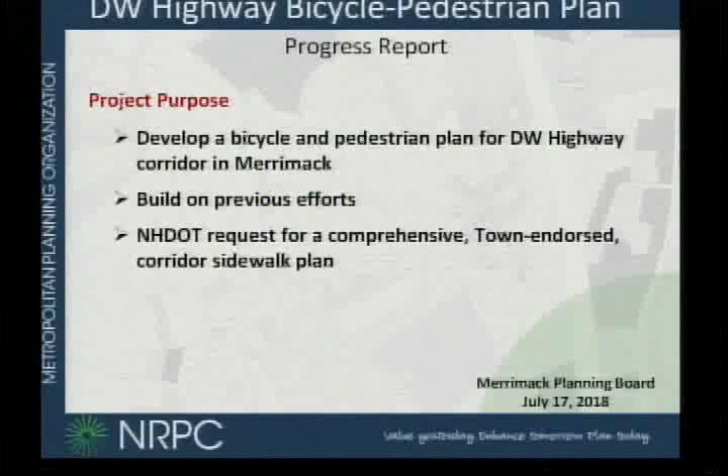So anywhere along the line here, just chime in if you want to ask or provide feedback. Project purpose, as a reminder: this is to develop a bike ped plan for the DW Highway corridor in Merrimack. We're going to build on previous efforts I'll talk about in a moment, and importantly, part of the reason for doing this corridor plan is to respond to a New Hampshire DOT request for a comprehensive town-endorsed corridor sidewalk plan.

The project has 2 scopes. Phase 1 is complete, and that was to map existing bike ped infrastructure in the corridor. I'll talk about that in a second, just to remind us what we talked about in December. Then Phase 2 is to actually go through a planning process and come up with a plan document.

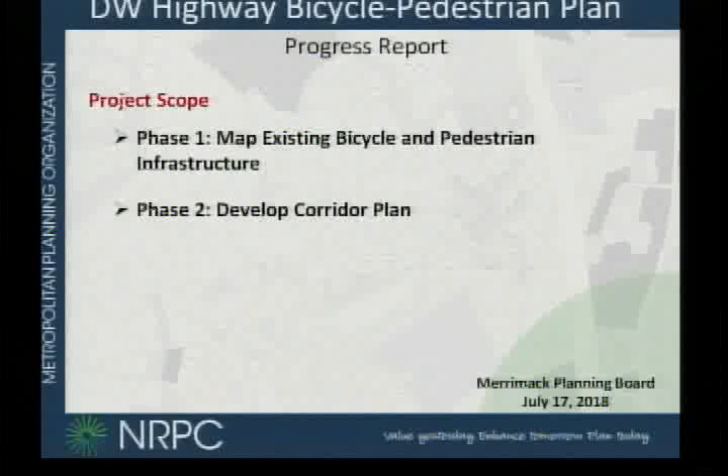So Phase 1, as a reminder: the process was our GIS department developed a base map using existing data layers that we already had. We took that base map and went out in the corridor. We basically drove and walked the entire corridor just to verify that information that we had.

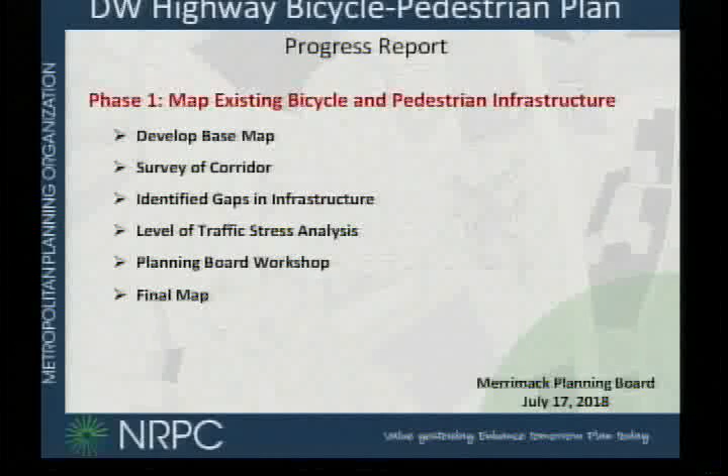Through that, we went ahead and identified gaps in the sidewalk infrastructure. Using that information, we developed a level of bicycle and pedestrian traffic stress, which is basically a way of taking the attributes of the roadway and calculating a measure of how comfortable it is to walk or bike along the corridor.

I think you'll recall we brought that information in a draft map to this board in December last year, got some feedback from you, and incorporated that into a final map. That's on the poster over there. I'll leave that overnight, maybe pick it up tomorrow.

If a little later we want to look at that map up on the screen, we can do that. I have that, and if we want to do it now or a bit later, we can. I just wanted to refresh your memory about that phase one.

So phase two is to actually develop a planning document. What we want to do is review existing plans, since there are several already developed previously. We did some additional data development. There's a public involvement process. We're going to end up summarizing key issues and then come up with recommendations, action steps, and an implementation process.

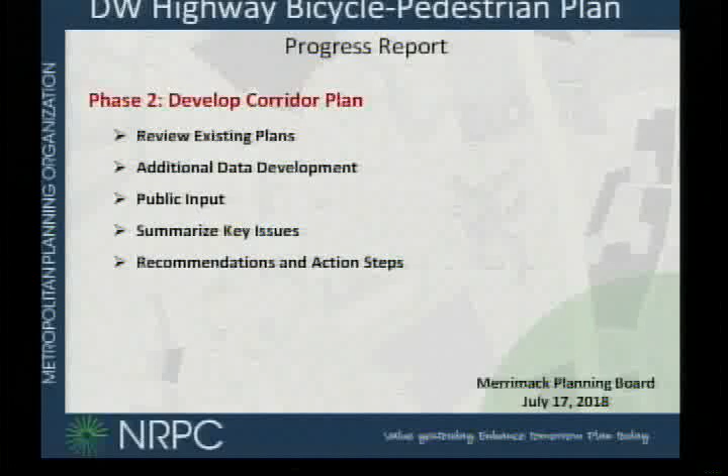So expanding on that previous slide regarding reviewing existing plans and documents, if it's helpful you can follow along in that outline document. Some of this is fleshed out a little bit, but there are existing documents previously developed, like the Town Center Pedestrian and Trail Master Plan.

There ended up being 9 recommendations for paths or sidewalks in that plan. I think you'll recall that included the area east of the Turnpike and from Rite Aid Plaza all the way to Front Street. In any event, there were 9 recommendations, and 6 of them happened to be along the corridor, so we want to consider them in this planning process.

The Town of Merrimack Master Plan refers to bike ped planning. In that third paragraph down in the introduction, you can see the master plan recommends developing a town-wide pedestrian and bike plan that considers design and location standards so that incremental sidewalk construction projects can be integrated into a single uniform network. So it's referenced in your master plan that was updated pretty recently.

The Mastrocola Safe Routes to School Travel Plan identified pedestrian and bike connections from the middle school and elementary school over to DW. So we're considering that. And then again, in 2013, New Hampshire DOT met with town officials to talk about sidewalks along the corridor, and as I understand it, they're certainly in favor of sidewalks, but they wanted to see them come from a comprehensive corridor sidewalk plan. That's one of the main reasons we're doing this, is to respond to that request.

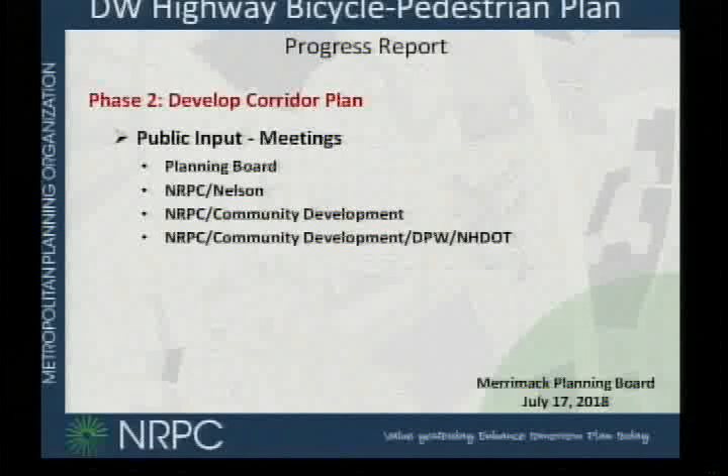NRPC has also met with community development a couple times, and I'm sure that's going to happen again, just to coordinate and make sure we're doing what seems to make sense for Merrimack. And then, really important, we will be meeting with community development, Merrimack DPW, and New Hampshire DOT, hopefully in August, to talk about some specifics and make sure that whatever we end up recommending for projects makes sense to New Hampshire DOT. So I hope that makes sense so far.

Another avenue for public input was voter surveys. I think you'll recall back in December this board thought it would be a good idea to get out there and get some feedback, and what you decided was to put together some surveys which were implemented at the April 10th town-wide elections.

3,010 voters voted that day, and 239 people decided to take this voluntary survey. To sum it up, 195 of those respondents believe that sidewalks and/or bike lanes should be constructed along DW. 23 voters said they should not, and 21 did not respond to that question.

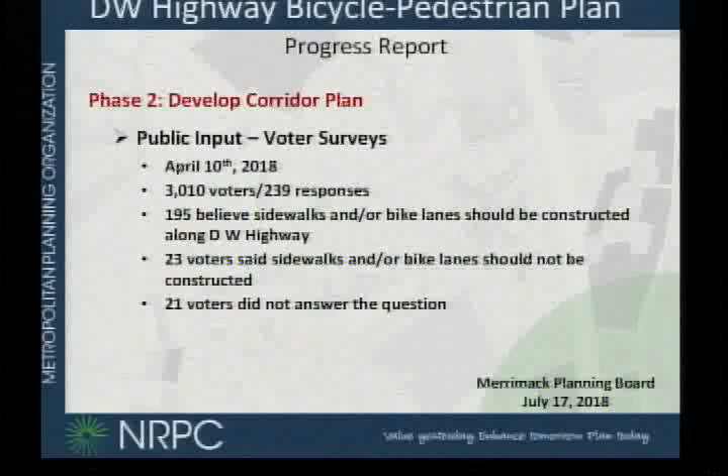The other question was a way to rank some of these segments along the corridor. Voters were asked to choose up to 3 of these segments.

The highest ranking segment was to complete the sidewalk network between Town Hall out to DW, and then up the west side of the corridor, past the library, past Wire Road intersection, over the Baboosic Brook Bridge to the post office. They thought that was the most popular for this sample of voters.

Second most popular was the other side of the corridor, from the intersection at Baboosic Lake Road, up the east side of the corridor, all the way over the Baboosic Brook Bridge to Merrimack Commons tractor supply area. Again, this was about completing the sidewalk network along that part of the corridor.

Third ranking was Watson Park to Twin Bridge Park, on the east side of the corridor. I know that segment also includes part of that Town Hall to Merrimack Commons stretch, but the idea was whether you want to go all in on a longer segment versus a shorter one, since there's some overlap between them. So a bigger kind of segment.

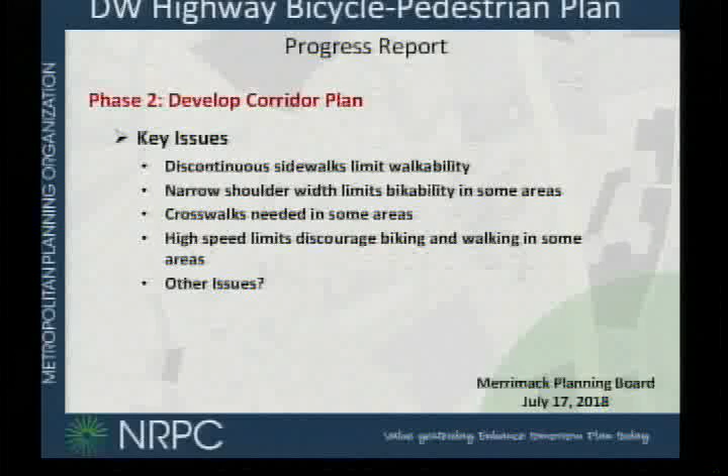We did come up with these preliminary recommendations, based on our mapping effort and voter surveys. The first group is to fill in the gaps in the sidewalk system, basically all of those segments I just referred to. Also, I know you don't want to let the Woodbury Street sidewalk fall off the radar. I know that was on the books to go forward, and it was also identified in the Mastrocola Safe Routes to School project, so it's an important connection back into that neighborhood and the school area. Don't want that to fall off the radar.

As far as improving bike conditions, one basic thing we can do is have a consistent shoulder width along the corridor. There are other pavement treatments that can be applied that will provide more detail once we have a draft of this document. So those are some recommendations, food for thought to start thinking about. We'll firm them up and in the future meet with community development, DOT, DPW, and start trying to dial them in a little bit.

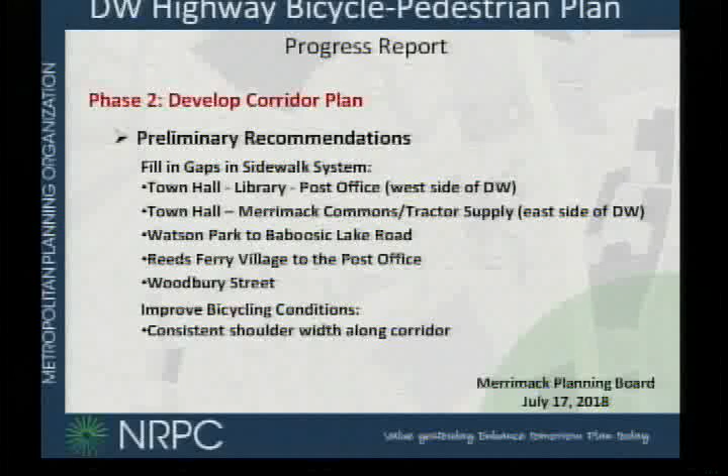I know that our work with you has been focused specifically on the DW corridor because we've got to make the best use of your resources as possible, and we can't sort of go completely across town.

With respect to dealing with the DOT, that makes sense, because that's the part of town where they've got some say in what we do, that and 101A. However, there's some support, I think the surveys showed it, for continuing the sidewalk up to the middle school at Madeline Bennett, up at Baboosic Lake.

I know that won't be captured in a DW corridor report because of what your focus is. That doesn't mean we can't support sidewalks going that way, even if there's not going to be commercial development there to build sidewalks. I do want to make sure we have that somehow incorporated into the priorities, so that when there's grant money available to apply for certain things, that's one of the items on the checklist our town could consider as a project.

Yeah, absolutely, so we could include that in there. I don't think it's been specifically in other plans, we'll have to double check that, but nonetheless, we can. It was one of the locations on the survey. It was on the survey, definitely.

Just in the newspaper earlier this week there were some finalized plans about 101A widening and pedestrian traffic there. I know, Tom, you guys got a report to the town council about that. I didn't really know a whole lot about that project until I read it in the paper. It seemed like that one had gotten forgotten about and was different than what we had talked about in the past. But there's going to be some sidewalk development out there that's also not in your corridor.

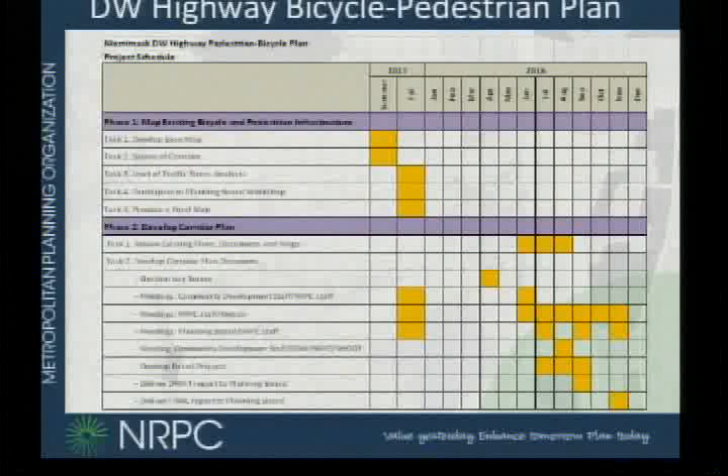It is for local officials designated by the town or city for a capital reserve fund for municipal transportation improvements, including but not limited to roads, bridges, bicycle, pedestrian facilities, parking, intermodal, electric vehicle charging, public transportation.

So it sounds like it's all encompassing. It's a statute we've got, we're using it, we've just dedicated it to road repairs. It could also be dedicated to other things if the council chose to do so.

It would go through the legislative body. You'd have to go to a warrant article to amend it, I think. But I don't know, probably so.

Either way, I think our role is to be a cheerleader and let the council make their decisions, because that's their role. We can make recommendations as part of the capital improvement plan, presumably, and certainly have that discussion with them when they come to us on those kinds of things.

Tom, do you happen to know how much of the assessment there is? Is it the full $5 that the statute allows? So there's no room to increase that, you'd be fighting to compete with other things that are already trying to spend that money. That's a tougher one.

Well, neither one of them is easy right now. It goes directly into road maintenance and repairs, and it's part of our annual paving budget, which is like $1 million.

Thank you for that, Tom.

Tim, one of the things I wanted to mention on the map you have, you guys did a great job creating some focus areas, I think you have 7 of them as you go down the corridor. That's really an excellent way to examine some of these areas and what the unique issues and priorities are in each one. Having that kind of concept come out in the final plan would be pretty useful.

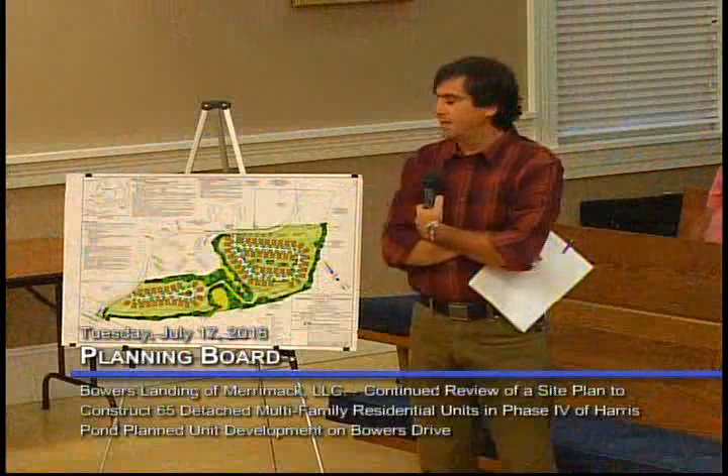As Tim just eloquently put it, we were here last month. I gave a full presentation on the package. We had a few minor comments from staff, which we've addressed. Really the only one was related to the sidewalk on the cul-de-sac, which the planning board was looking at. We extended the sidewalk to the end of the cul-de-sac here, and extended it up into Phase 7, which we'll bring forward when that next phase comes forward. Other than that, we got comments from CLD and staff and addressed them all, got them back. There might be one or two that may be outstanding, but pretty minor.

Being first on tonight, I'm going to keep it short and simple and answer any questions you may have. I do have one other thing - Fire Marshal Manueli has had a chance to look at this. He has not finalized his memo, but the only comment he has is that they will need hydrants per the regular comments he typically makes for these projects, about 400 feet apart or something.

Matt, one of the questions that came up last time, I think Nelson may have asked it, was whether the people who buy into these units will have access to the clubhouses or other amenities built in the previous phases. What we're doing, because we have multiple different kinds of users here - right now we have the apartments and the existing clubhouse behind the Dunkin' Donuts. We'll be coming in with some future apartments in the next phase, and we envision attaching those to that clubhouse since they're similar uses. This phase is similar, with our clubhouse now at this location. So we'd have the townhouses and single families all use one clubhouse, which reduces the fees. The owners have met to get it all put together, and that's what they're moving forward with right now.

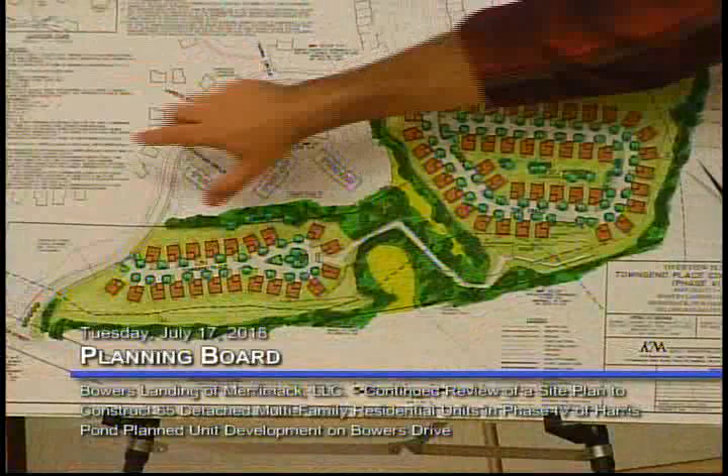I'm not sure I understood when you said there's no pool over there. If you remember, when we did the 50 units on this one, there's a clubhouse right at the corner. It originally was going to be a clubhouse for this whole parcel down here, but it was going to be in the middle of those apartments and stuff, so we moved it and did the 50 and put it here.

So these will all be one association. The apartments will be one association, with 2 clubhouses on site. Again, recreation, passive recreation, also with trails. We tried to incorporate sidewalks, the whole 9 yards, so that it is a community.

One question - you said 2 associations, so are there going to be 2 different associations, or is it all one? There currently is one for the apartments existing up on Bowers, and then there's another. I just wanted to clarify that.

Thank you, Matt. Other comments or questions? All right, let's take a moment to conduct a public hearing. Is there any members of the public or abutters, citizens who wish to weigh in and offer the board any information? Please come forward to the table here.

Come on forward. Let me bring that. You go ahead and sit down there, I'll bring you this quickly. What happened to the microphone? You're certainly welcome to both testify at one time, but I didn't mean to suggest you had to. Come forward together. We know each other, we're friends. Well, I'm glad of that. I'm glad we don't have one in favor and one opposed, you guys can just duke it out there at the table. Once you're settled in and ready, make sure the microphone's pointed towards whichever of you speaks first. The folks at home can hear us fine in the room, but they get nothing when you're not by the microphone.

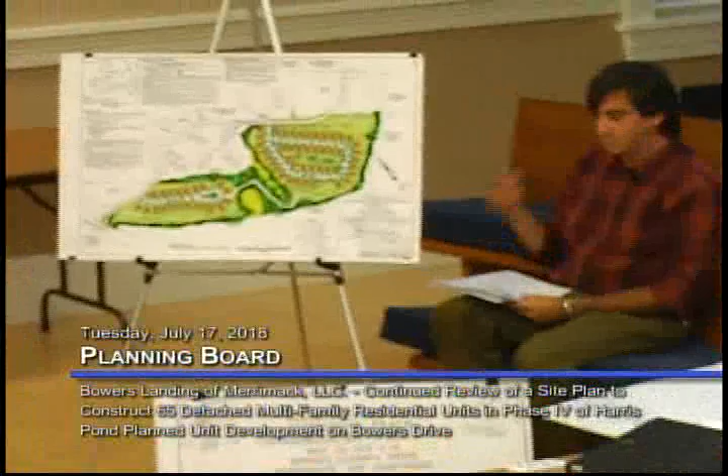I think Eric covered the questions that I had, but I wanted to make one comment about the layout. It looks to me like there's going to be a kind of 4-way intersection at the entrance to one of the areas. I think it's Esquire Lane, the existing street, comes in at the same place. Yes, right there — at that point you have two streets crossing right together.

It would seem to me that it might be more aesthetically pleasing and maybe better for traffic flow if the new street entered at a different location, further towards the right on this map. I would just ask that the developer consider that. Sure, I'll certainly mention it to the developer. I think there's some strategy to the way they've laid it out in terms of Eric's question about sight lines — if you moved their driveway towards that curve, you might find yourself in a position where that curve prevents you from having that 250 feet.

Well, actually, it seems to me that the site, with the present trees — as you can see on the drawing, there are trees very close to that intersection in the new development area, while there are no trees whatsoever on the other side. So by moving the road in the direction I'm proposing, you would, in fact, improve sight lines. Now, if sight lines don't include trees, I guess that makes no difference, but I don't see how it could hurt sight lines. I don't see where sight lines have been considered for the present plan.

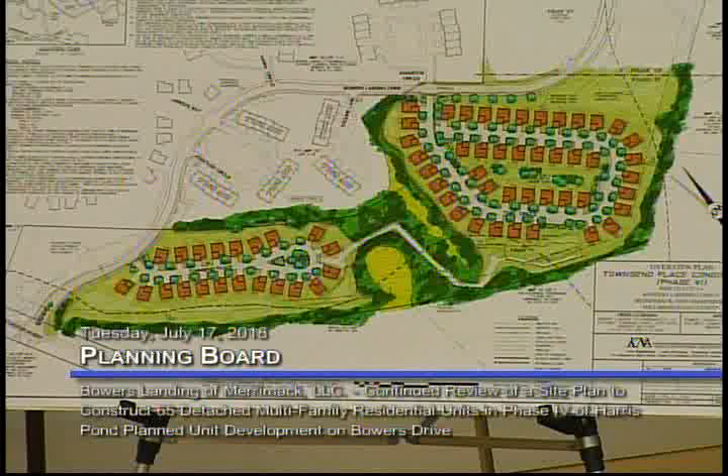There's a lot of thought that goes behind aligning the roadways to how they meet the ones across the street. And if they're not going to meet straight on, you want them to be a certain distance apart so they don't turn into each other or have people that aren't expecting cars to come off the other road. There's probably a dozen other factors I don't relate to off the top of my head that tend to dictate the way the plan has to be laid out to work and satisfy all those requirements. So it's tricky.

It's not always easy to make adjustments. Not the least of which is headlights in somebody's living room window if it's not coming to a T intersection or a cross intersection. Yeah, that's true, if you have intersections that don't line up.

Again, if you look at the map, the likelihood of headlights in people's windows is much greater the way it's laid out than if you had the new portion moved downward. As people come out from the new portion, headlights are going to tend to be into the existing units, whereas if they moved down, they'd be into a wooded area.

I understand your perspective. We'll let the applicant take a comment, take a look at it, and see. Thank you for that. Are there other members of the public or abutters who wish to weigh in? All right, seeing none, we'll close the public hearing. We'll invite the applicant to come back up and take the table and respond to those things. Thank you, gentlemen.

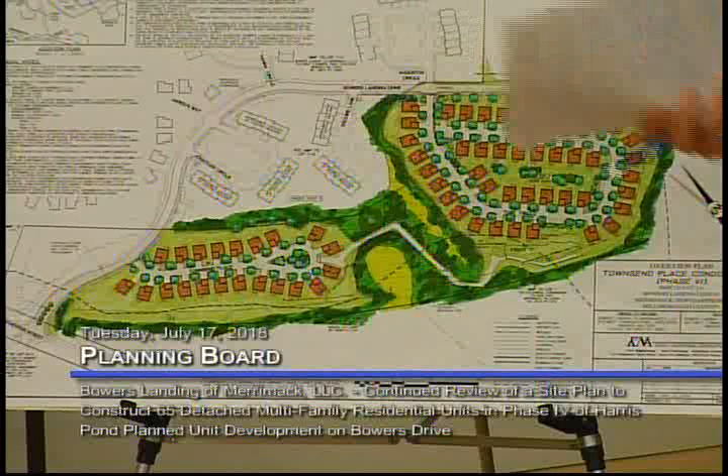Okay, good evening, I'm Matt Peterson again. The homeowners association, as you stated, the pump station would be the responsibility of a homeowners association, not the town of Merrimack, so that would be one of the things the homeowners association would have to take care of. Number two, as the Chairman stated, the wetlands, we've mapped all the wetlands here this year. We do meet all the setbacks. It has been reviewed by staff. We are not in the 100-year floodplain, so there are no issues on that.

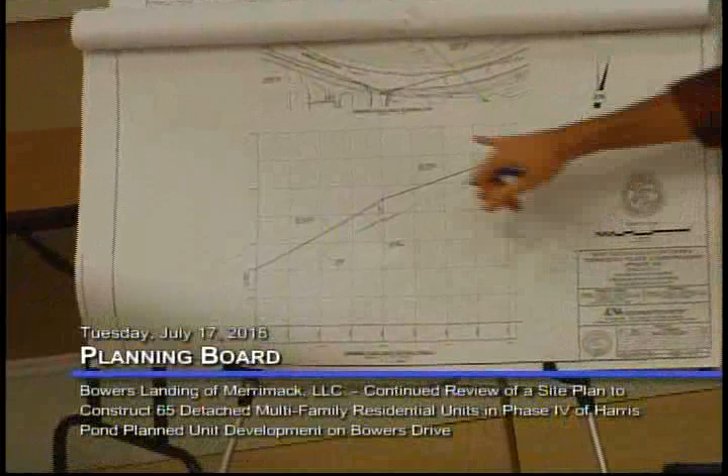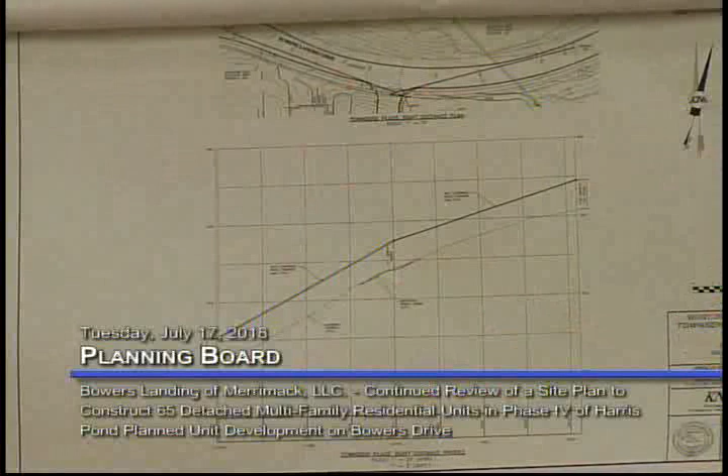We have all the survey out there, it's just a matter of cutting the profiles that we did. CLD didn't ask for it. It was an existing roadway, so there was no need for this particular project to do the sight distance to that location.

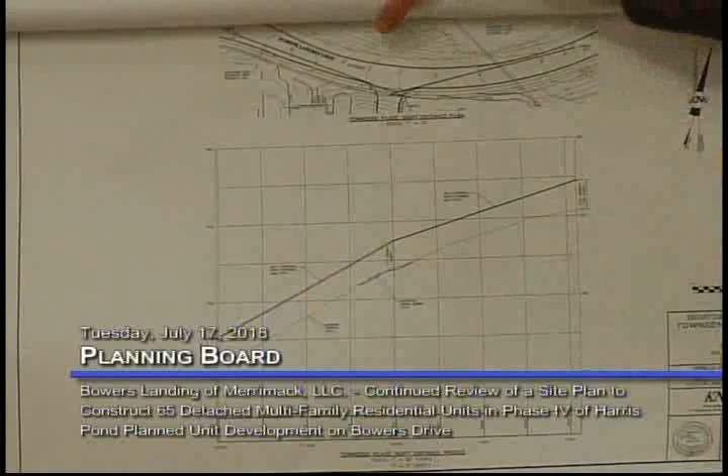No, I understand. And if it's not one where you're required to do the sight distance, I'd still ask you to consult with your client. If there's something in the way that I heard should be fixed, that doesn't make sense. I'm sure nobody intended to put fences or trees or something blocking the view from that turn, and it's probably something people can correct if it's a problem out there.

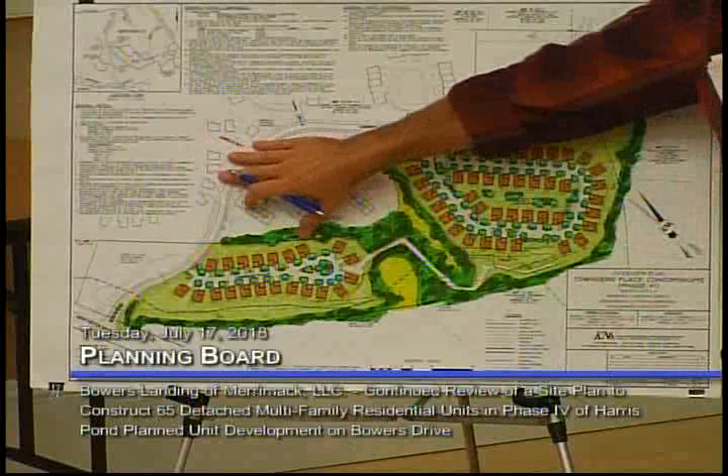And then the last thing I wanted to state for the board members and the homeowners that just spoke - we had met with this group last time, so I was told, but I heard something different tonight, so I don't want to go back and forth with that. I'll leave it to the board to say I'll build another clubhouse at this point if we can't combine with the other one. We thought more people would help bring down the fees and everything if they're already full. I've got the room right here, I already did it. I just didn't put a building there because I thought it was overuse, because you've got to pay for them both.

So if we can't work it out with staff and the homeowners association to allow use of this one, we would build one right here with the parking that's already there. It's already flat, and I laid it out that way originally anyway, so that's what I'd ask based on the comments.

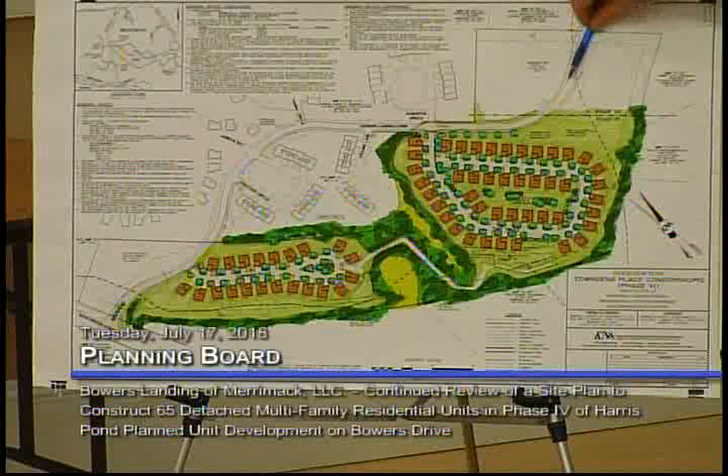Thank you for that, Matt. How about talking a little bit about that intersection by the upper circle, across from here, as we come down this grade is dropping. We're a lot higher at this point. Let me go to the grading plan for you.

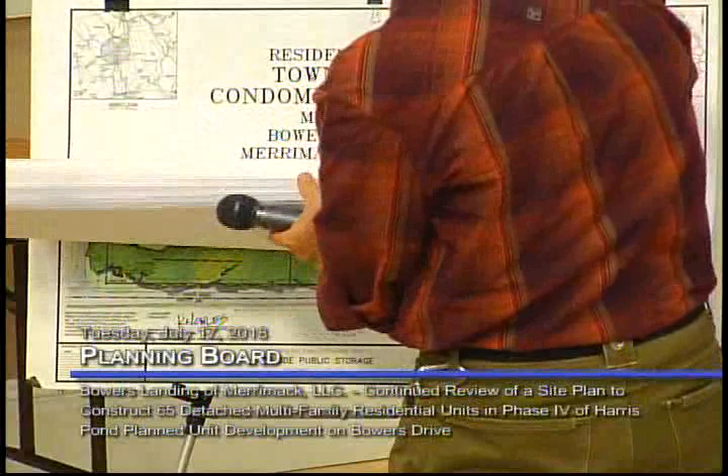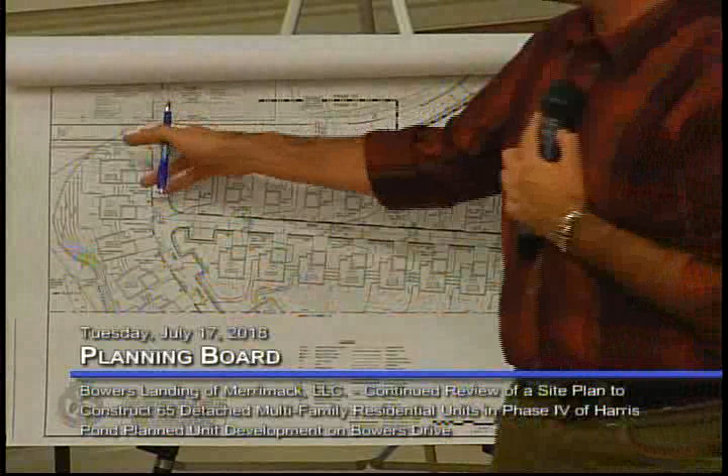So up at this location we're at 220, and then it goes up to 225 here. We came down into the site at this point. I've always been taught to line driveways up across from each other, because the homeowners will yell at me about headlights going into their property. We do have the sight distance at this location.

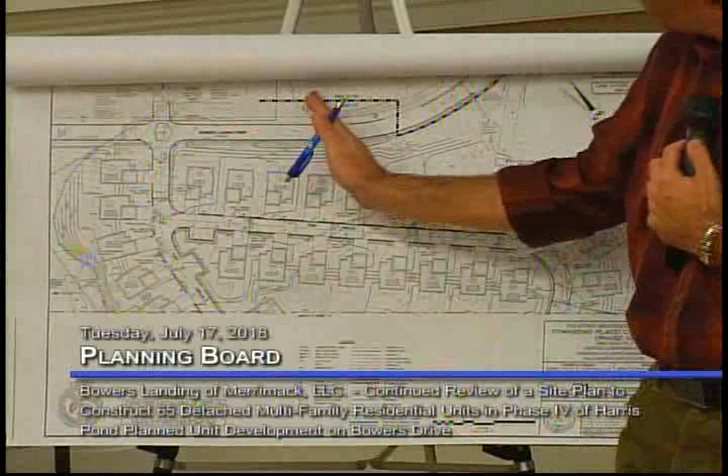I lined up intersections. We're looking at a potential future intersection here for the apartments we did concepts for and met with staff about a while back. We haven't shown them on this plan because the buildings aren't finalized, but I'm starting to run out of room between them. So this made the most sense with future plans - one here, another proposed here, and one more up here - so they all make sense as future plans, in order to meet the spacing requirement between driveways.

Any members of the board have further questions for Matt about the comments raised by the public or anything else?

Back to the memo - are there any waivers we're taking up? There are not. Okay, so then board members, it's appropriate to take up whether you'd like to take final action on this application, and if so, what that would be. So what is the will of the board?

Mr. Chairman, I would like to propose that we give conditional final approval for this, subject to the various points that Matt just made, also the memo dated June 11th, 2018 by Mr. Price, and also any of the comments from Mr. Manueli, the Fire Chief, which are already in the record. Otherwise, I would make the conditional final approval.

Is there a second for Alistair's motion? I will second it. Second by Nelson. Further discussion?

Remarks by Matt included that business with the clubhouse. Oh, absolutely, yes. Okay, I'm okay then.

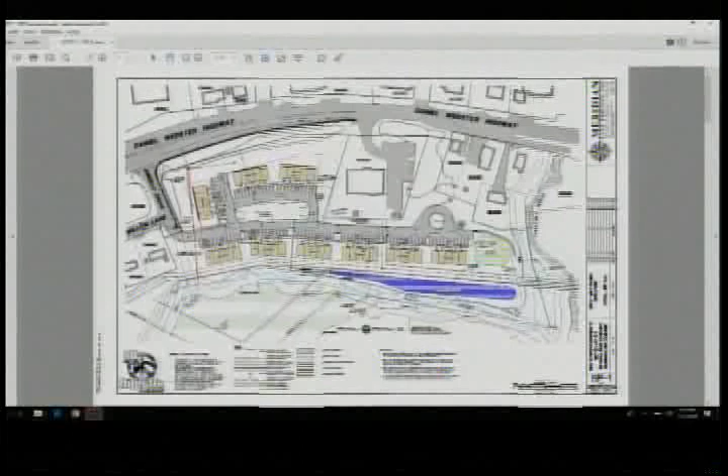Basically, what you're looking at, the entire project mitigates stormwater through conveyance catch basins to a large infiltration basin sized to meet the town's requirements and state requirements. We're showing adequate parking throughout the development. We've got pedestrian sidewalks throughout, including all along Daniel Webster Highway.

I'm going to go further in depth with the waiver request in a minute, but one thing that's really important to note right now is that during our design phase, we found out that a large portion of stormwater drainage from Daniel Webster, Greeley, Continental, and even some of the on and off ramps of the highway flow down and discharge onto this property. At this location right here, there's a 30-inch pipe that comes out. It's right next to Angelo, right here.

I have been in communication with DPW, and I've asked that this approval be conditionally based on designing that. It's going to incorporate us working with state and local entities to determine the exact extents and, more importantly, ownership of catch basins and culverts. It's our intent to convey that stormwater through a culvert straight through the development, shown here in red, and discharge it right to the wetland and water area.

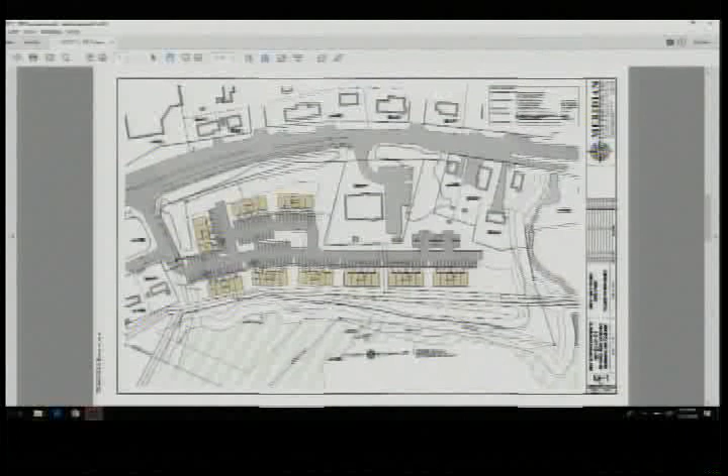That doesn't look so good. Did you have to give it up? It's pretty obvious, if that makes sense, but just odd to have it that way in the first place. Yeah, it is odd to have it that way.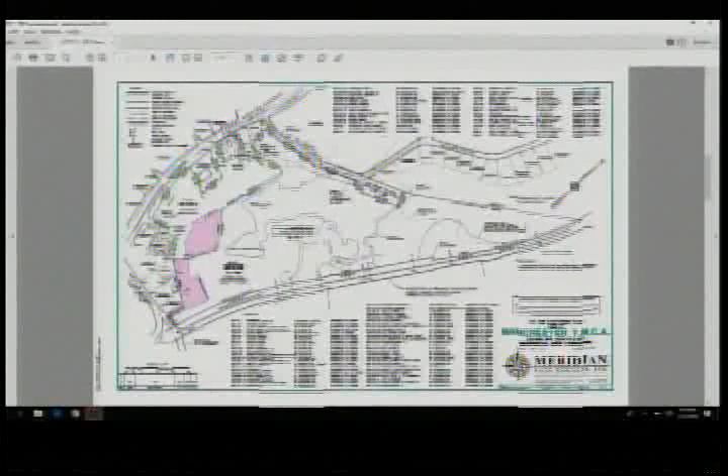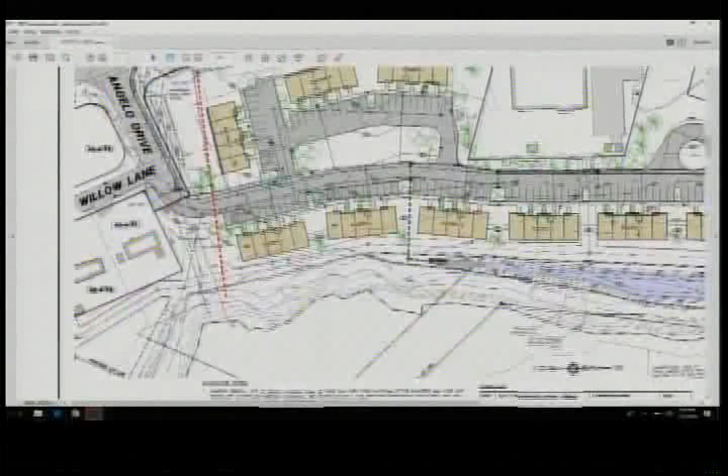Tell me a little bit about the topography, what's going on with that land, because one of the things coming off the page at me is you're damn near getting access to Griffin Street as another potential entrance or exit to your property before you do the transfer. Once you do the transfer, you are quite a distance from it, but not that far from Griffin Street with the flag as it exists now. A little bit of help from the YMCA, and you could solve your second access problem through Griffin Street to Greeley Street.

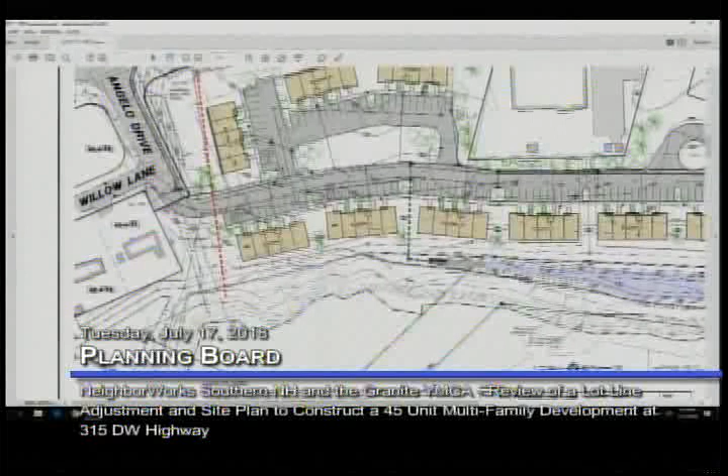At the conclusion of the last design review meeting, members of NeighborWorks and myself walked that entire sewer easement line all the way out to Griffin, and it is not friendly terrain. There's an extremely close pinch point to wetlands, and a sharp right-hand turn to get into Griffin next to a sewer pump station. Not a friendly access, and an extremely long access to get to Griffin. We felt it was uneconomical and would be a burden to improve and do the dredge and fill permits required to get that access to Griffin. Not saying it can't be done, but it would have been a tremendous burden.

It does sort of give you an entrance that gets you to a signalized intersection at Greeley Street, and it also avoids all of these folks on either Island Drive or Angelo Drive who would prefer to see the traffic go somewhere else.

I don't think I can argue with that statement. But if Island Drive is only the backup entrance for Captain Manueli and his team, that's not quite the problem it was when Melton were doing it, which was considered likely to be the primary entrance, which is why, God rest her soul, Rose Arthur made our lives a misery. But I think that's not necessarily so, it's a partial - the fire department prefers it not be gated, which means it's going to be access for the patrons as much as for the fire department if you don't gate it. And the DPW has some serious questions about the Angelo Drive approach because of the slope.

So yeah, I don't see how you can avoid Island Drive. Neither one of these entrances is great. I'm with Tom on that.

But I also understand that access on Griffin Street is very difficult because of the slopes and the downhill. If you come down that turn, it's downhill to go underneath the railroad trestle there, which the town has been struggling with for years regarding access to a boat ramp down there. And I'm going to just guess, speaking for the applicant, that the costs associated with that, with the density they're proposing, would not work financially.

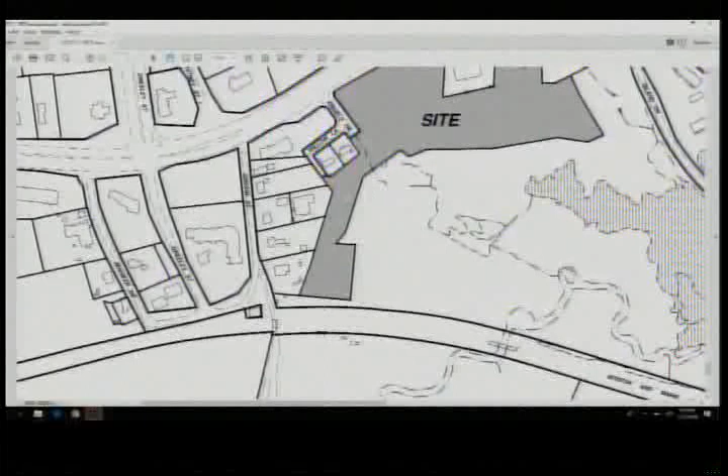And to be quite honest, the idea of traffic coming out onto Island Drive to get back onto DW Highway, that's a big issue too, because that junction of Island Drive with DW Highway is already a bad junction. I'd hate to think of this being the prime access, which is why everybody before didn't like the Melton way of doing it.

Well, and Angelo Drive, the folks over there don't like it either. It's not a good access point either. That's why the Greeley Street thing made sense, because then you're putting people at a signalized intersection where they can get right on the highway if they're going to work, not on DW Highway, unless they have to be to go north or south to get to work.

But I get the idea that it's expensive. The comment from the fire department was about a second means of emergency access. That's how I understand it to be. It's been verbally explained to me, I haven't gotten it in writing. That's how I understand it to be. No, we don't have it in writing either, but what's been suggested is that they would reluctantly accept a gated one, but they prefer it to be ungated.

And if it's ungated, which I think I prefer as well, then that's public access. You're really not going to keep people out of it by saying, oh, don't go here. They're going to go right through there. And frankly, I'm not sure that Island Drive isn't a better access than Angelo Drive.

Neither one of them is great, but I agree with you. Angelo Drive is almost a 10% slope leading right down to where your driveway is, which is what DPW's questions are about with that entrance. In the Melton Associates plan, that was adequately regraded to 7%, which can easily be done.

My phone conversation with DPW this morning - the request was to have Angelo extend past our development into the hammerhead turnaround, so that snow can be pushed straight forward, backed into our development, and then pulled back out Angelo. Can you do that? Yes. If that satisfies DPW, that helps deal with Angelo Drive in terms of what DPW's concerns are.

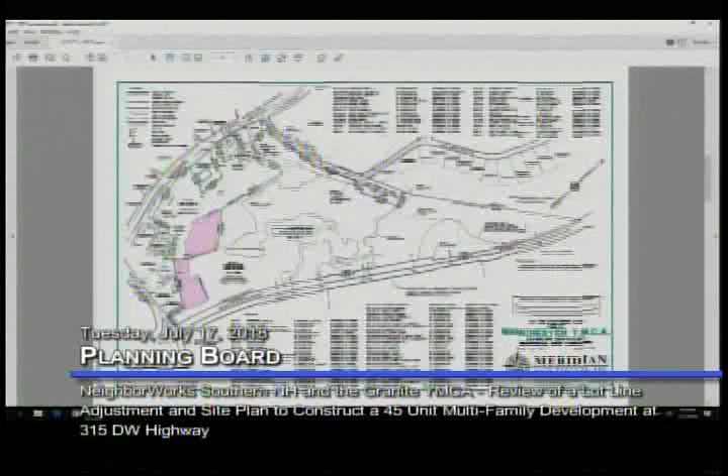Going a little further, we're touching base on this lot line adjustment. We were talking about this, and then we jumped into access. The need for the lot line adjustment is to convey water all the way down to the edge of wetland - that's the main purpose of it. We also use this to allow us to shift units back and forth a little to provide equal separation, and allow some drainage culverts to get pushed between them. Otherwise we were bumping into some of the old building setbacks, so it was twofold: it helped us create a more uniform development, but also allowed us to access the edge of wetland down in this location to properly discharge stormwater.

So tell me more about the discharge.

I know that you don't have to treat the water, but what do you have to do to deal with flow rates so that you don't erode? What does your head wall look like where you dump a 36-inch pipe?

There's a couple of options. There was a drainage basin feature, call it larger riprap with a plunge pool that could really dissipate all of the energy from the stormwater. You just need it on a larger scale for a 36-inch pipe. This might be a 42-inch pipe. We don't know until we interconnect all the way back. I can't really answer that question until I get to that point.

I do know I need that whole slope and access to all of it in order to create an adequate stormwater design. Okay, I understand.

So that's touching base on the lot line adjustment. I don't know if you wanted me to jump into the waiver request now, or if you want to talk about these items separate. Please proceed in whatever order you think is right. Okay, that's fine. So the waiver request is for parking.

To meet the town's requirements, I need 154 parking spaces. This plan here, which you board members have, shows 154 parking spaces. This equates to 3.4 spaces per unit, based on 1.25 spaces per bedroom plus 0.5 spaces per unit.

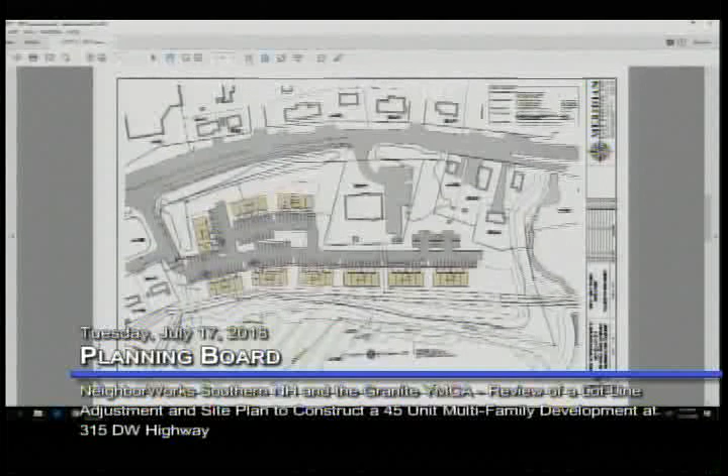Just to clarify, Kevin, the data that NeighborWorks has from their previous and existing projects, is this a number that's consistently been appropriate for the project? Correct. They have, I don't know if it's the demographics of the people who live there, the number of cars these people have, but they have that information in detail.

So remind me of the numbers. Well, how many do you want to build on your cul-de-sac plan, not this? 100 versus 154, so we're asking to waive the construction of 54 parking spaces. And how many apartment units do you get? There's 45 units, a mix of 3-bedroom and 2-bedroom.

Are these rentals? It's all rental, townhouses I guess, if you'd like to call it that classification.

So your approach is, I know it's not exact because of 2-bedroom and 3-bedroom units, but roughly 2 parking spaces per residential unit. One space per bedroom, probably. That's kind of the vicinity we're at. I can't recall off the top of my head. Thank you, you can read the plan. I'd have to scroll into it. So there's 105 bedrooms, so it's close to 1 per bedroom. Yes, it's pretty close to 2 per unit.

And the reason I specifically asked Kevin that question is that when you're looking at parking waivers, that's one of the criteria the planning board has directly from the regulations: when an applicant has comparable data from their own projects in other places, that's one of the justifications for granting a parking waiver. Understood.

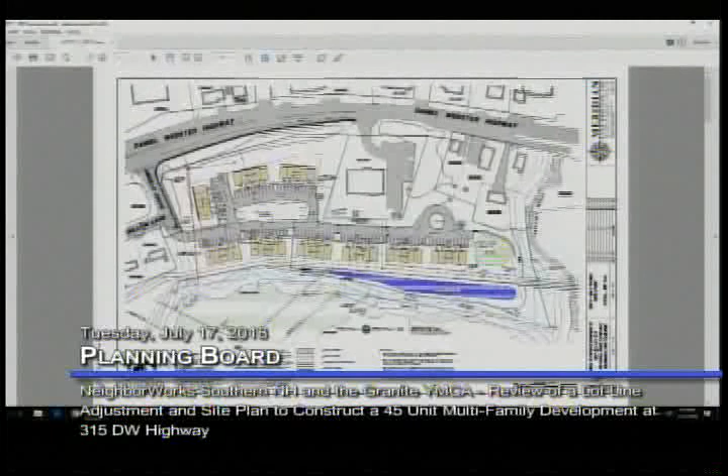Chairman, if I could interrupt you, I apologize. I have Jennifer with NeighborWorks here with me who would like to speak a little more to parking. She knows numbers like Robert does, so I'll give her a minute. Do you want to see her? Thank you, Chairman.

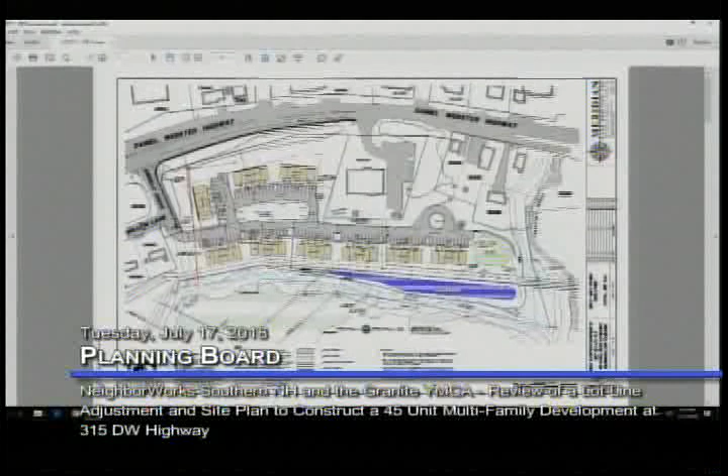I'm Jennifer Vadney with NeighborWorks Southern New Hampshire. Just to follow up on what Kevin was saying, typically we do 2 parking spaces per unit. So I absolutely can appreciate the idea of parking per bedroom, but really, whether it's a 2-bedroom or a 3-bedroom, it's 2 spaces per unit. As Kevin said, it's really accurate to the family sizes and dynamics. Typically it's one driver and a couple of kids, or if it's 2 drivers, it works out because we have single people in some of these units as well, so there's only 1 car per that unit, and then we do 10% extra for guests.

So typically we have not had any parking issues. It's all rental, it's a lease issue. People, when they sign their leases, know and understand that it's 2 spaces per unit. So they're actually assigned 2 spaces? Correct, there's an assigned space by number, a particular space, and it belongs to them.

In any neighborhood, any parking situation, once in a while there's a call that says, geez, this person has an extra car, and we work with the tenants. I don't think we've ever had an eviction because of too many cars. Okay.

It's an issue I think you guys have to manage, and if you're managing it, it sounds like it can be made to work. I think the cul-de-sac area and some of the areas where people could edge-of-the-road park or edge-of-the-pavement park needs to be managed and controlled. But other than that, if you guys think the parking works, I don't have any issue with that, and I'll support the waiver the board puts forward.

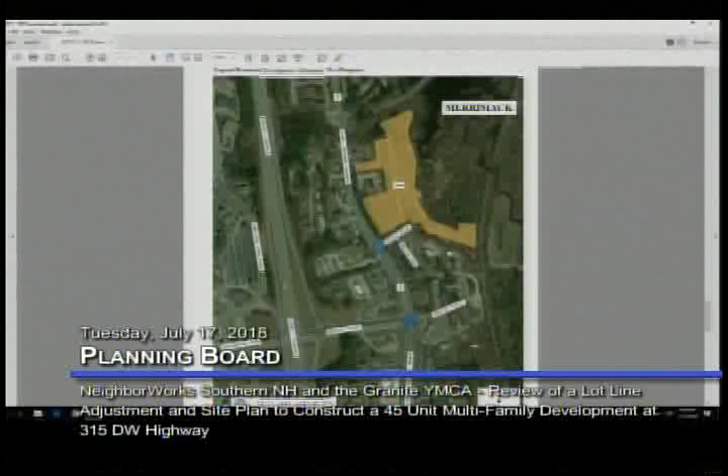We distributed these trips to the adjacent roadway network using U.S. Census journey-to-work information on people who are living within the town of Merrimack and where they are working, for the weekday morning and evening peak hours.

It showed that approximately 35% of the traffic would be headed to and from the north along Daniel Webster Highway, approximately 30% to and from the south on Daniel Webster Highway, and 35% to and from the east on Greeley Street. They would be headed mainly towards the Everett Turnpike and down Continental Boulevard.

Based on this distribution, it resulted in traffic increases of approximately 8 to 12 vehicles per hour during those peak hours on any of the adjacent roadways, which is approximately one additional vehicle every 5 to 8 minutes.

We did a capacity and queue analysis at each of the two study area intersections using the Synchro analysis model, which generally showed that there were favorable operations at both of the study area intersections.

At the Route 3 and Greeley Street intersection, all of the movements were operating at what's considered an acceptable level of service, D or better, during all of the time periods that were analyzed, with the exception of the southbound left turn movement into Greeley Street.

However, this is an extremely low volume movement. It has less than 10 vehicles during the peak hours that are making that movement. It was operating at a level of service E, which is still considered acceptable for a low volume movement like that. The volume to capacity ratio was well below 1.0, which indicates that there's more than adequate capacity there to accommodate it. The additional traffic generated by this project was not anticipated to increase delay on any of the movements through the intersection by more than 2 seconds per vehicle, or increase queues by more than one vehicle in any lane.

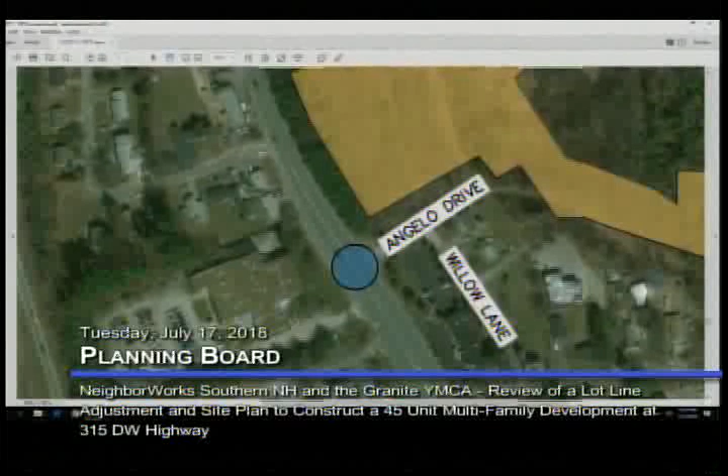Yes, so I'm not too worried about this one, Bob. No, I am not either. But some I would be, you know. I think there's an awful lot of water flowing across this site to deal with the drainage, and that's where my thought comes from. Traffic flow isn't going to change based on there being a hammerhead or something like that to analyze.

But this is a fairly complicated site drainage-wise, because for whatever reason they're the repository of half the drainage in town already, through no fault of their own. And that's going to have to get dealt with over into some kind of an outlet structure that isn't designed yet. That was dealt with on the previous application, but me as an engineer, I can't just blankly stamp that. I need to verify that, which is why I'm going to the extent of evaluating that drainage area.

But that was reviewed, previous application took that into account. But you realize that what you just said is we should trust an old plan, but you're not going to trust an old plan. You need to look at it before you're going to stamp it, but you want us to bless it without... I mean, if you need to relook at it again, why don't we? There's a difference between somebody's stamp on a plan and somebody reviewing a plan.

I know, and the stamp and the signature on this plan will also be mine. It's part of our role. Now, I don't want to be a stickler for details because the normal process on these sites doesn't have very significant things that aren't there for the first time for the review, but this one raises a couple of eyebrows for me with some of the things that we just don't know.

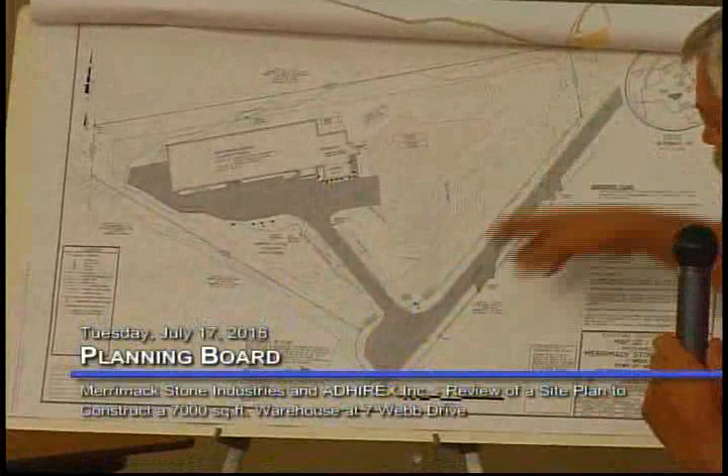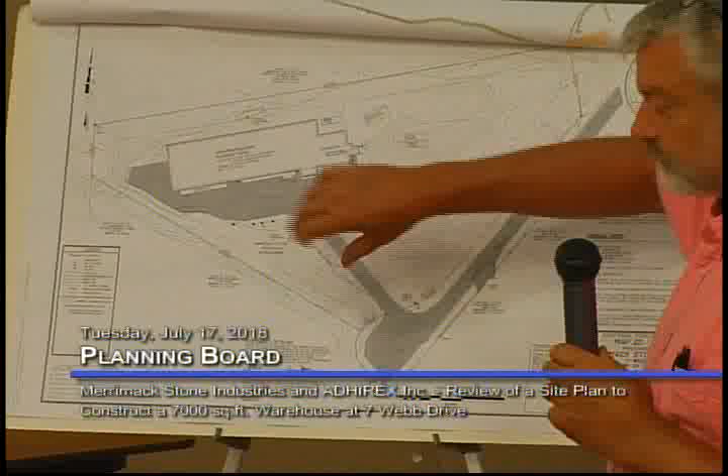For which he cuts granite, makes countertops and that sort of thing. And he has a nice flat spot off to the right, which is the intent—he's outgrowing what he has now, so he's proposing to add a 7,000 square foot metal building with the pavement going around it.

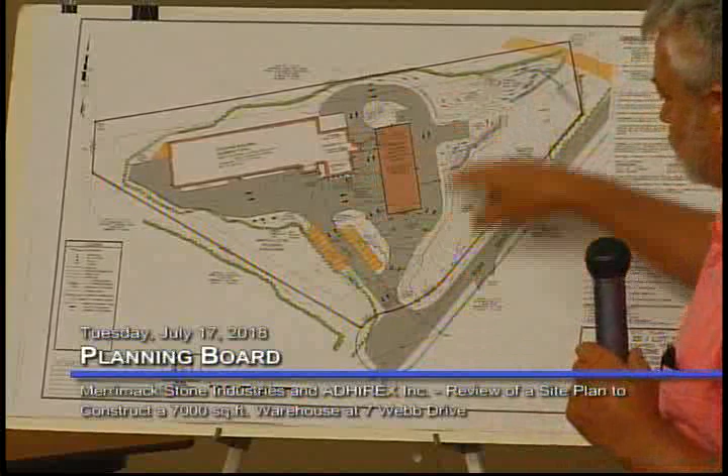The impervious area will be mitigated in terms of stormwater by 3 basins that will be placed around the site. The parking is designed to be adequate, slightly more than what is required, as has been pointed out in the staff memo.

We would like a waiver for the sidewalk, as it's industrial, and I don't see that it would be appropriate for this site.

And for architecturals, we've given the structural plans, which show the elevations from all 4 sides, but they're not all fancily rendered. If that's suitable for this application, we'd like that. If that needs a waiver not to accept those, then we'd like that as well to be one of the waivers.

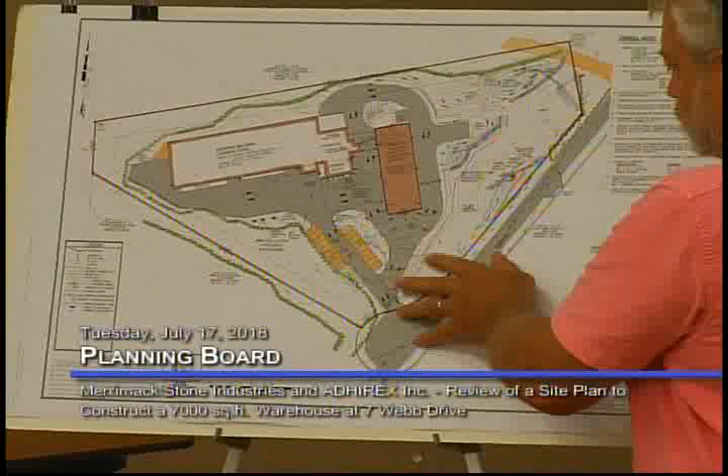We're anticipating any work—this will all end up being a grassed area. He's willing to plant some trees too, but that's something we'd look maybe for a little guidance on.

So, originally we weren't going to have a bathroom and then decided to put a bathroom in. We're right next to the septic tank, so it's going to be a short run to the septic tank, and we can extend the water line out of the building just 20 feet or so to connect. So there's a note that no water and sewer—no additional service required off of Webb Drive. It'll just be pulled out of the existing building.

So that's basically it—there's a minimal amount of grading because of the spot that's there already. We would be looking to—right now he's overflowing into some storage trailers, and we're looking to change that and be able to put things inside the proposed building.

It's late, my mind's mush, so I'll hand it over to you guys.

Thank you for the brevity. I think it's a fairly simple, straightforward design. I think it's just getting some peer review done so that we can take a look at what they do.

And the other two waivers we could take up at the next meeting—there's no landscape plan or lighting plan. If the board doesn't feel the need for those, would need to be waivers, or that need to be provided. We're showing packs, and we have the detail for down-lighting packs, so we're showing it, but not with the illumination, not with all those contours for lumens and everything.

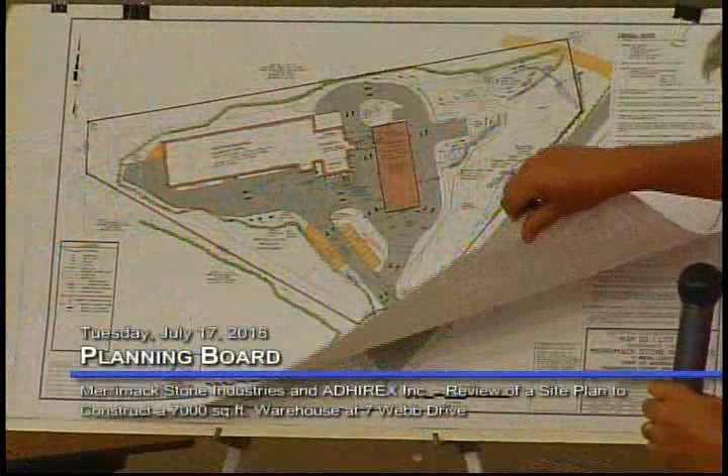Yeah, but I was trying to get it, you don't show any trees or any kind of undergrowth. What I was trying to understand is if this is totally visible from Webb Drive or not, and it's not - there's trees all around it, right? From Webb Drive, no. All of that area there is full of trees, it's cleared. On Google Maps it's all treed, you can barely see where the trailers are because there's trees overhanging, there's trees at the back.

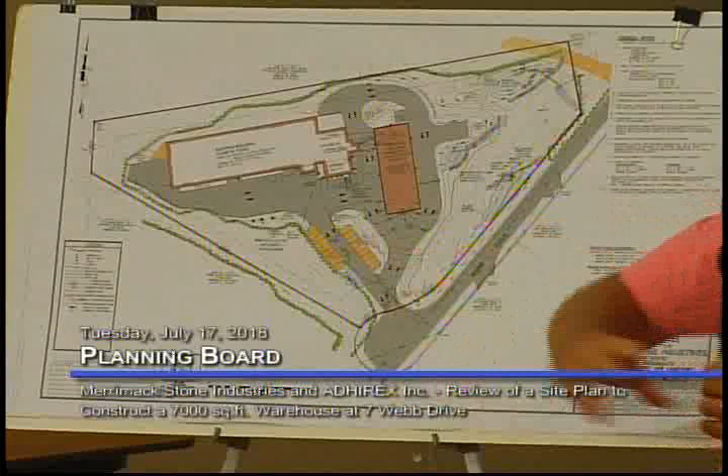There's vegetation, but we submitted something last year at this time, and there was an enforcement issue - piles of stone all through the trees. The directive we got was to clean that up as a first step. In that process, because they were within the trees, they took most of the trees down to be able to get that stone out of there and clean the site up as directed.

So, is it or is it not visible from Webb Drive? From Webb, yes, you can see it from Webb Drive, but you can't see it from DW Highway. So we still have a motion without a second, but let's talk a little bit about what some of the choices are.

You can ask for or refuse to waive the requirement for elevations and look at what the outside of a metal building looks like, and I can probably draw that for you. The other waiver up for consideration is whether we waive the requirement for a landscaping plan. Nope, that's not before you yet. Well, it's one of the ones we talked about. Yes.

Potentially coming before us, and it could be something that we discuss tonight orally with the applicant. I'm inclined to not have them give me a landscape plan for the whole site, but to commit to putting some trees between that building and Webb Drive, to screen it. And I think screening the building with some trees is more important information to me than what does the outside of your metal building look like.

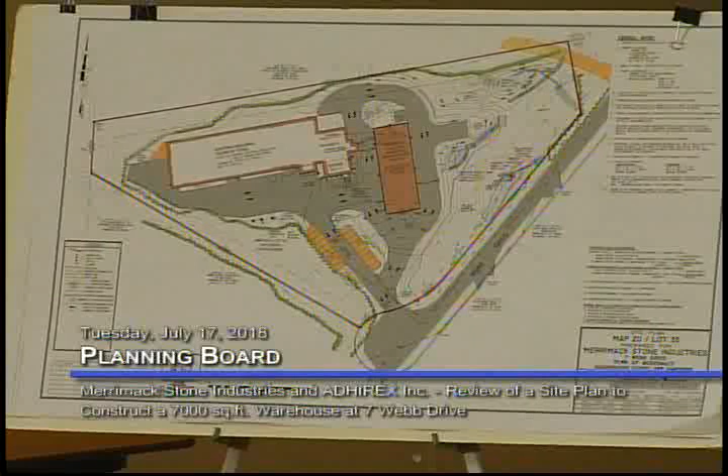Now, the other thing I didn't consider is what's the length of this building, and does it meet that requirement we have where the uninterrupted 100-foot length has to be offset in some way. It's 140 feet, so our regulation does say 100 feet has to have a break in it. So we've either got to waive that or screen the thing. The waiver request for building design was general enough that we would consider, if you do grant the waiver, to provide the renderings, it would also include the break in the building. It's to the overall section.

So, again, Alistair has made a motion that we grant the waiver of the elevations and the waiver of the sidewalk in one vote. Is there a second for that motion? I'll second it now that I better understand. Okay, there's a second for that.

Speaking to the motion, I think one way or another, either screen it or make it look nice from Webb Drive. Trees can be a solution, making the building architecturally interesting or having some offsets in the length of the building is a solution for us, but it's probably a terrible one for you guys because you want a building that's rectangular and doesn't have jogs and offsets in it. It doesn't make any sense from your warehouse standpoint to have jogs and offsets in it. So I think screening is probably the solution that's better for you guys. I don't know, it's not a ton of trees, but it takes some trees to do that screening for that to be effective.

I think at some point, as we're voting on this, we're sort of making that choice between which way we're going to go. Do we ask you to provide us with some information about what you would do to screen it if we grant this motion that says we don't really care what the building looks like? Is that okay as an approach to you guys?

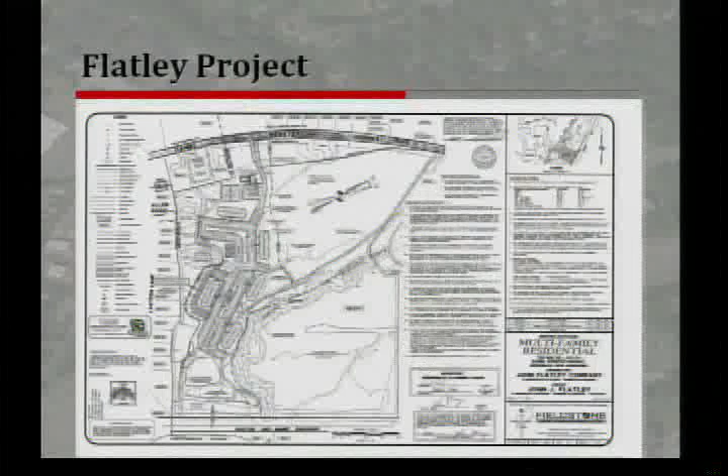Flatley project, as you're all familiar, off of Daniel Webster Highway. The initial site plan is for 240 units of multifamily housing, the first 4 buildings of which have now been granted approval. The conditional use permit was in 2015, Phase 1 site plan signed by the board in 2017. The project is now under construction.

The multipliers I use to determine the number of school-age children we anticipate on these projects comes from New Hampshire Housing Finance. It was a very elaborate, full statewide study done by Russ Thibeault of Applied Economic Research in Laconia, looking at the variety of different types of residential housing units and determining the number of school-age children that each type produces.

When you get into multifamily development, the average number of school-age children per unit is 0.17. So out of those 240 units for multifamily for Flatley, we're expecting to see somewhere around 41 school-age children to come out of that project.

Edgebrook Heights, southern part of DW Highway near the Nashua town line. Conditional approval in 2014 for the CUP. It was held up by a lawsuit. The approvals have now expired. There is a settlement agreement in the works between the developer and abutters. We'll actually be meeting with the project engineer next week to discuss potential resubmission. So we expect it will likely be resubmitted as a new application either later this year or next year, with the mix of use likely modified based on discussions between the abutters.

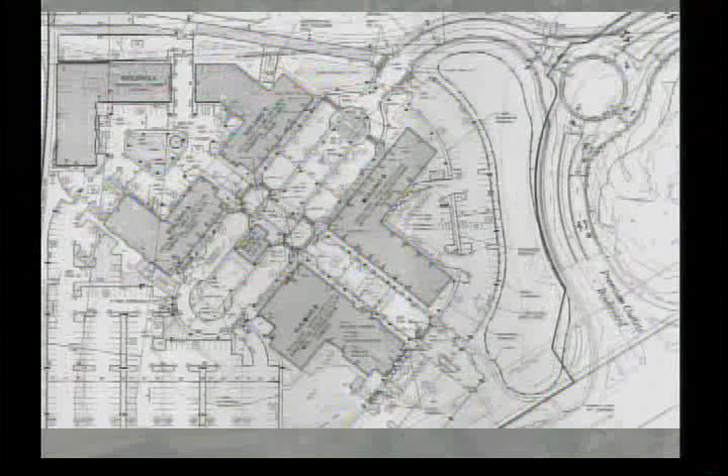Merrimack Park Place, the 20-acre parcel at the entrance to Merrimack Premium Outlets, was recently approved by the board. Just a quick overview of the plan: multifamily development, mixed use with hotel, retail, event center, and professional office space. Conditional use permit approval in 2018. The site plan was conditionally approved on March 6th. 192 units of residential. There's a hybrid multiplier I've used for this, discussed during the conditional use permit process — the 0.17 multifamily multiplier for the 2-bedroom units.

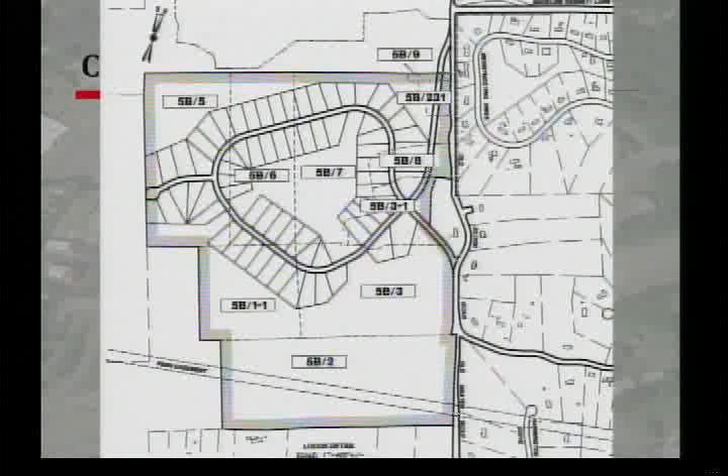Chestnut Hill has cleared all the lots where there would potentially be building at some point, south of Merrimack Middle School — a 72-lot subdivision configured between Madeline Bennett Lane and Old Blood Road. The 72 lots were signed by the board in 2016. To date, there's been no movement on any construction beginning.

For single-family homes, the study has a range of multipliers, 0.09 for a two-bedroom home up to 0.99 for a four-bedroom home, averaging out to 0.64 for all single-family homes. So what I provided here is an average estimate using 0.64, which would be about 47 kids. And if these are all four-bedroom units, the high estimate would be about 72 kids out of this project.

I would be shocked. This is another project where we'll be meeting with the people who got it approved. Mr. Tenhave isn't actually the one who wants to build this project, he's marketing it, trying to sell it. We've met with several potential people looking at this project, and we keep getting the same answer: the density doesn't support the amount of off-site improvements and construction costs associated with it. So unless something changes, I don't anticipate this happening for quite some time.

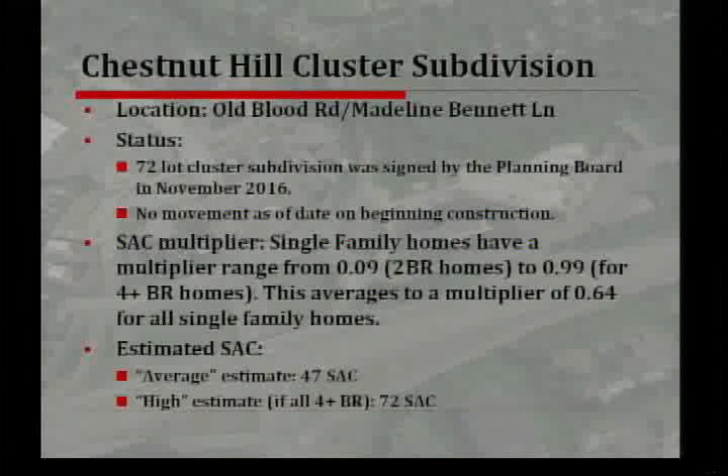This one still requires a sewer. Yeah, that's one of the big things preventing it, which is why we gave them an additional 4 or 6 units. That was specific to the zoning board's variance request, yes.

Tomasian, off of Leicester, Tomasian Drive, Amherst Road, known as Windy Hollow Circle. It's a 19-lot cluster subdivision nearing or possibly completed at this point from when I did the presentation. That multiplier is the same as before - I did an average and a high: average of 13, high of 19. The actual enrollment as of April 2018 was 3 students out of the 15 completed homes at that point.

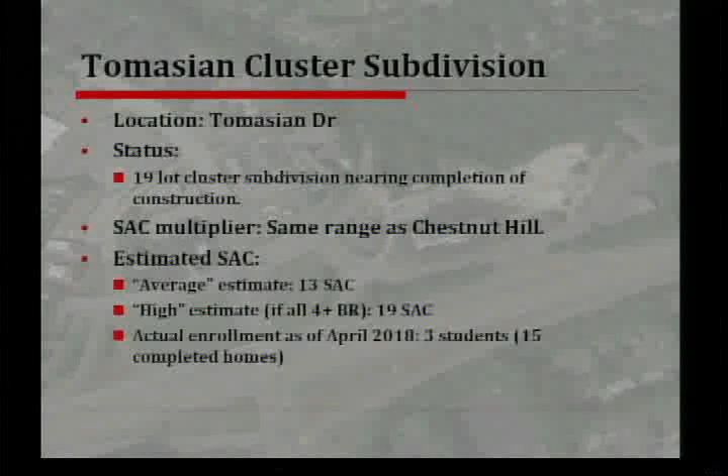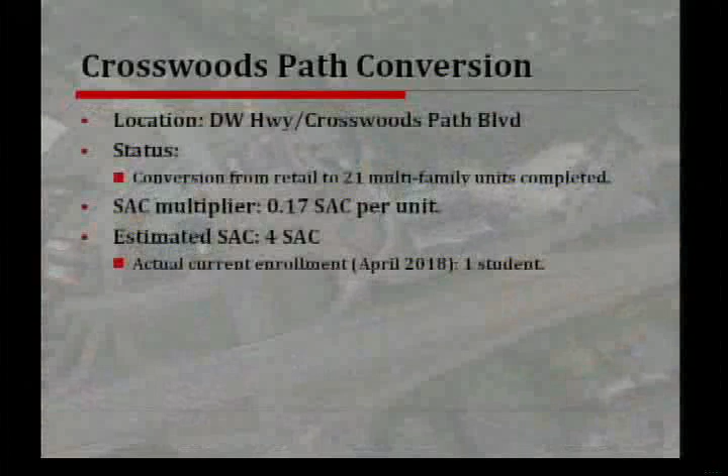Crosswoods Path - this was the project that converted a former multi-tenant retail commercial building into 21 multi-family units. The estimated school-age children out of this was 4. At full build-out and full occupancy, there is, as of April, only 1 student currently out of that building.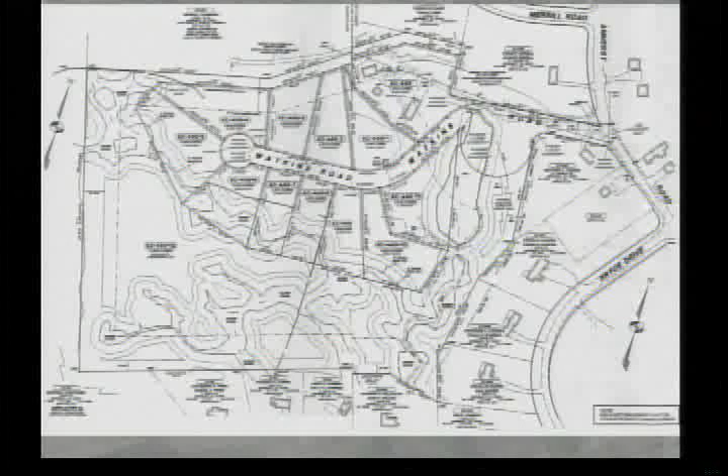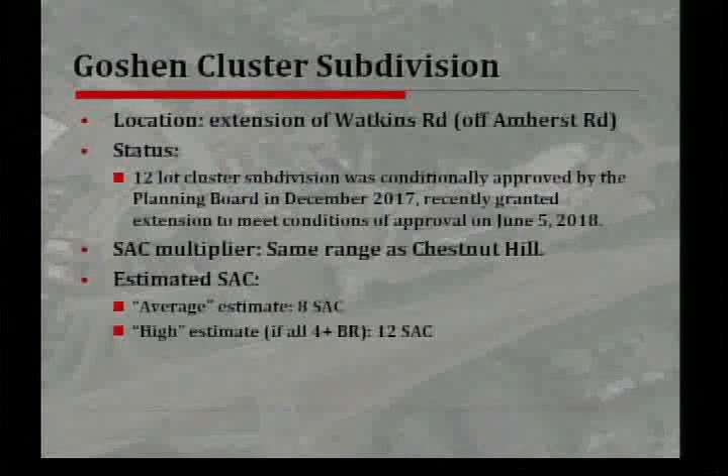Goshen, the subdivision off of Amherst Road, 12-lot cluster subdivision. One of the reasons why Dan Ricker is now on the planning board - this was the project that got him involved as an abutter and interested in the process. He lives not too far from here on Merrill Road. This project was conditionally approved in December, and you guys recently granted an extension to meet those conditions last month. We're looking at an average of 8 and a high of 12 out of this project.

NeighborWorks, which we just discussed tonight, so you don't need to see the plan again. Previously a 57-unit elderly project was presented conceptually. The first public hearing tonight is on the 45 units - using our multifamily estimate, we're estimating 8 school-age children for that project. And then Bowers Landing, again discussed here tonight.

Thank you, Tim. Could we have those as a slide? Yep, I can send you a PDF. Thank you, that'd be great. Can you post that too on the planning board's or community development's website? I can do that. Thanks.

I don't, at this hour, have any other questions or discussion about it. I think there are some other subdivisions that are minor, like Brett Vaughn's thing. Sure, at the time I was looking for the major single-family projects. And I think the Overlook senior project won't have any kids at all, but it's still worth keeping track of the housing units that have been approved, it counts.